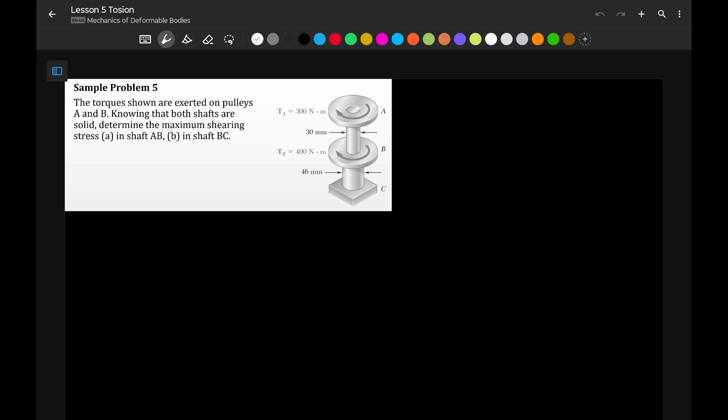So, the shaft ABC is standing vertically. We have an applied clockwise torque of 300 Newton-meter at A and 400 Newton-meter at B. Let's draw this on a horizontal orientation instead - here are our shafts.

So our shaft is divided into two segments. Here is point B, this is point A, and this is point C. We laid it horizontal since we're more used to that orientation. Point B is larger - let me correct this. Shaft BC is bigger, with 46 mm diameter, compared to shaft AB, which is smaller with 30 mm diameter.

Now let's apply the torque. To easily designate the torque, check if it's clockwise or counterclockwise, then place this symbol, which means torque or twisting moment. Let's set this direction as positive clockwise, so we know our convention. This is just a convention - it could be reversed. What matters most is that we know which is clockwise and which is counterclockwise.

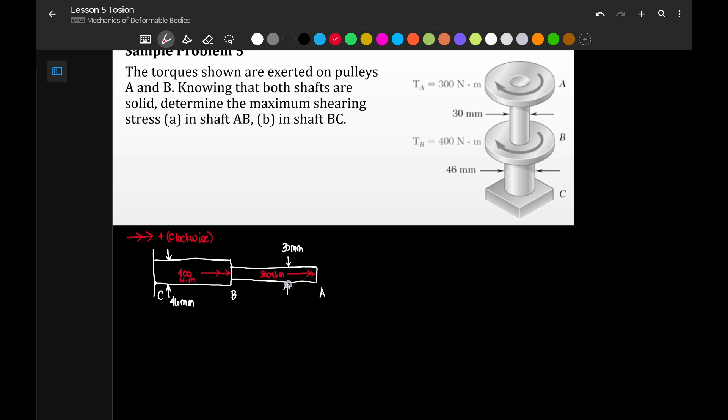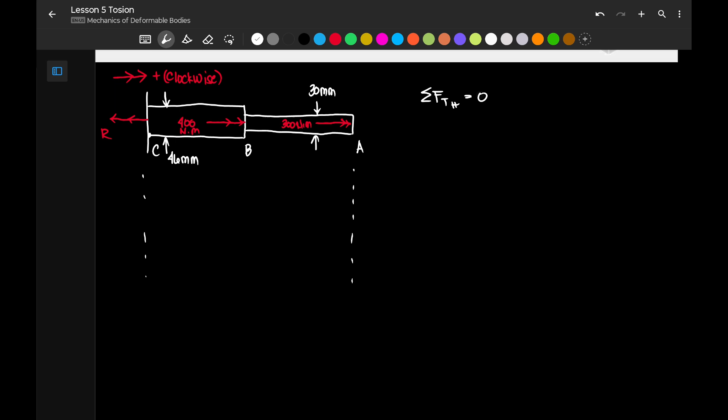Now let's create the moment diagram. By summation of moment, we can get the reaction. Taking summation of moment equal to zero, treating these as horizontal forces - summation of torque horizontally equal to zero - we get an equivalent reaction of 700 Newton-meter, and this is counterclockwise since it's in the opposite direction. So by our sign convention, that is negative 700 Newton-meter.

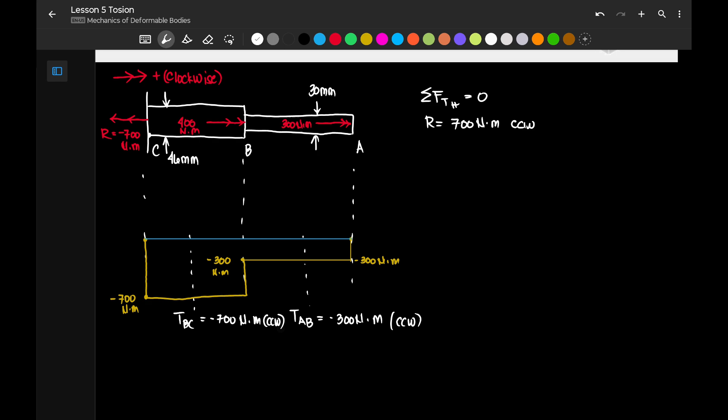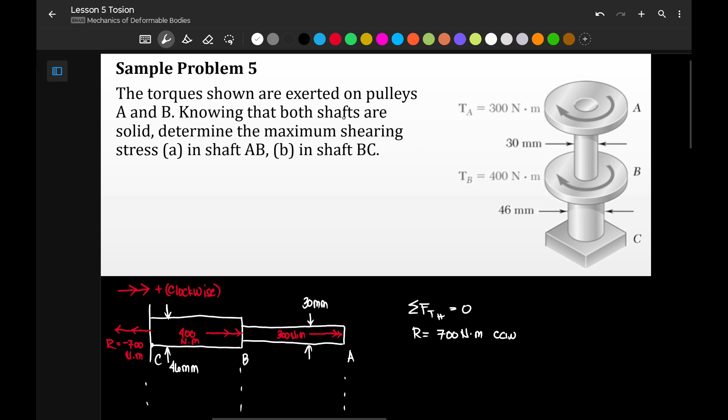Okay, so let's try to solve for the stresses from these torques. Let's start with shaft AB. Since both shafts are solid - the problem didn't indicate otherwise, but they are both solid - our maximum shear stress is equivalent to 2T over pi r cubed.

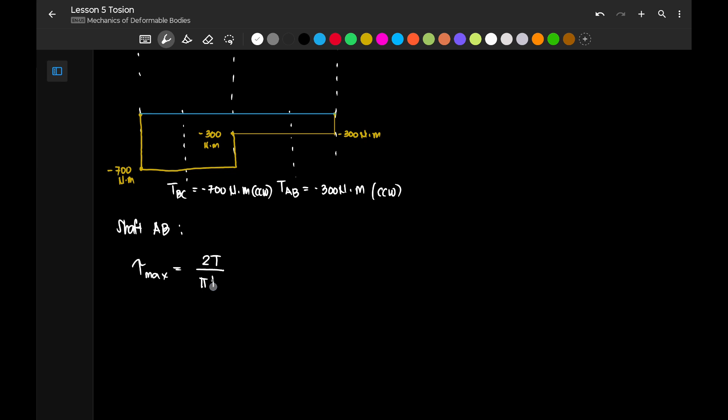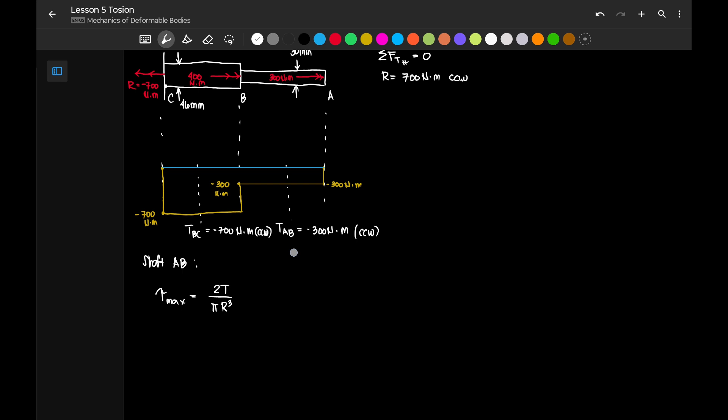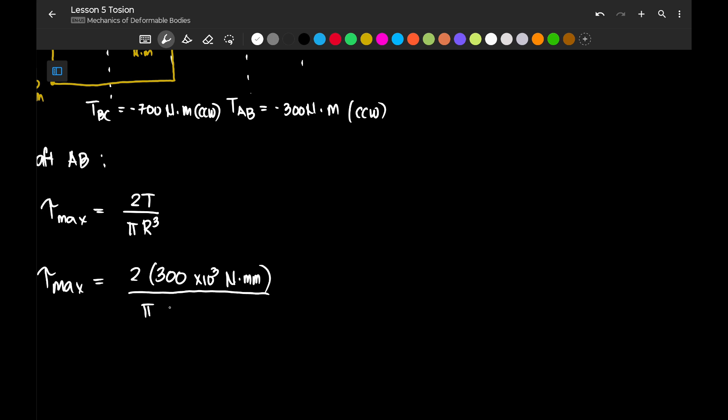For shaft AB, the diameter is 30 mm, so the radius is 15 mm. Our tau max uses T equal to 300 Newton-meter. Since it's in meters, we multiply by 1,000 to convert to millimeters, giving us Newton-millimeter, divided by pi times the radius of 15 millimeter, which is half of the 30 mm diameter, cubed. So our tau max for this problem is 2 times 300 times 10^3 over pi times 15 cubed, which gives us 56.588 megapascal. This is the stress under our shaft AB.

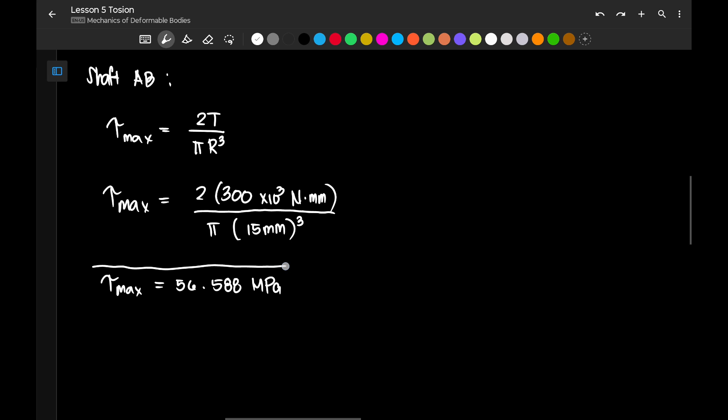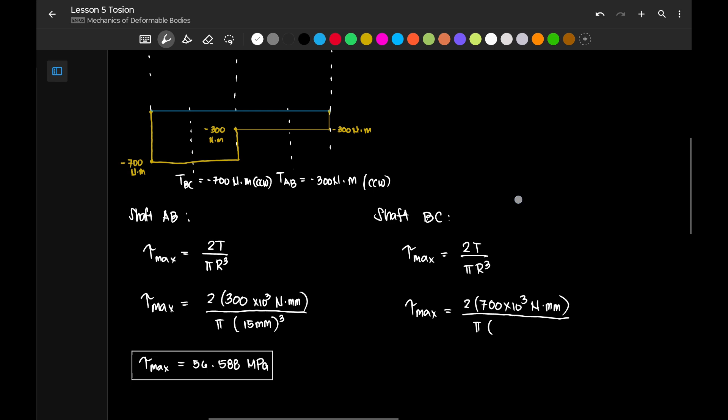Okay, next let's solve shaft BC. Our tau max is the same formula, 2T over pi r cube, same formula kasi parehong solid. So our tau max becomes dalawa. Ang torque natin for segment BC ay 700 times 10 to 3 Newton millimeter. Again, kaya nagkaroon ng times 10 to 3 ay kinonvert natin yung meter to millimeter. Then our radius for this shaft BC is kalahati ng 46, so 23 millimeter cube.

So our tau max is 2 times 700 times 10 to 3 over pi times 23 cube. We have 36.626 megapascal.

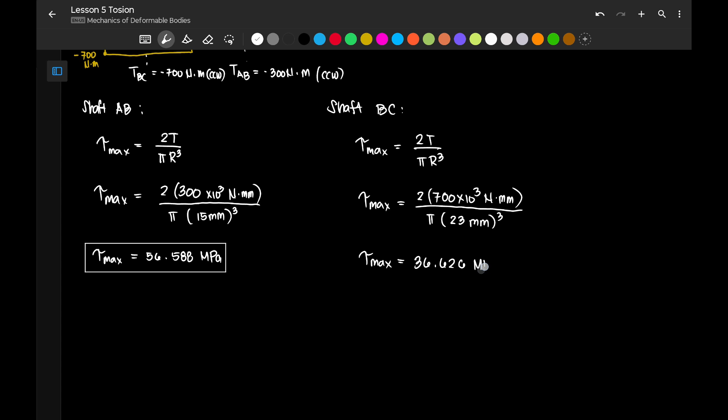Okay, now if the question is, let's say ang tanong ng problem, what is the maximum shearing stress? If this is the question of the problem, tapos ang choice mo ay A and B lang, kasi ito lang na may na-solve mo, the answer is letter A, kasi maximum ang tinutukoy. Kapag maximum stress, yung pinakamalaki ang sagot natin.

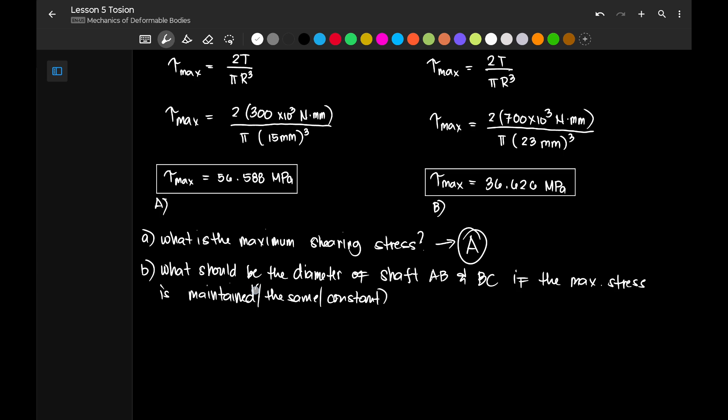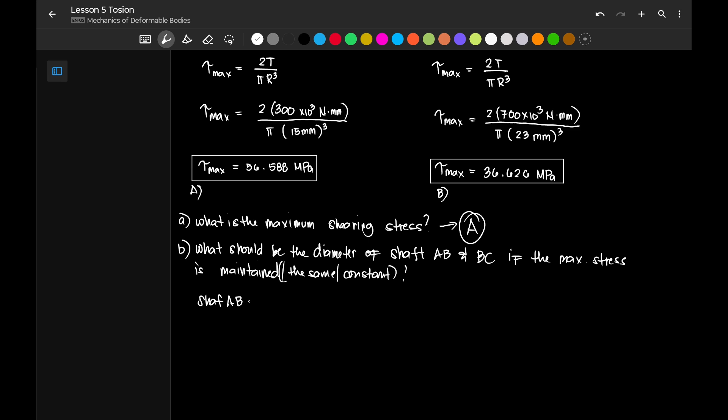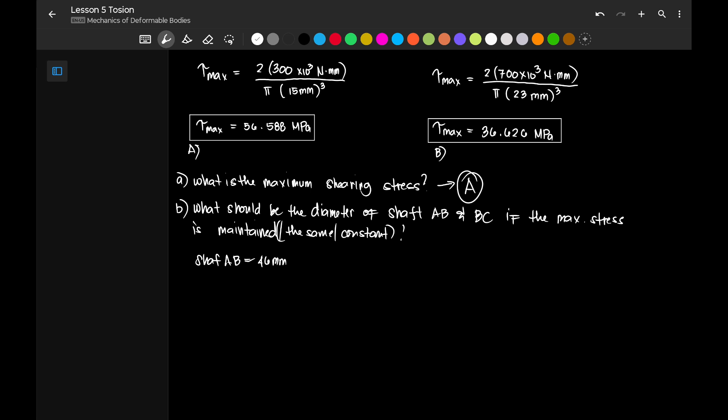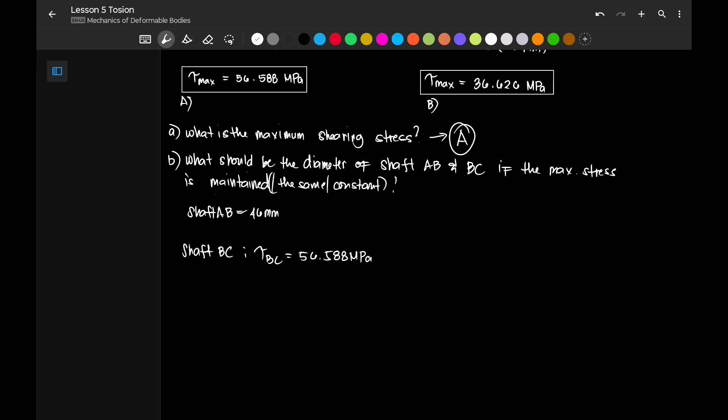Pero pagdating kay shaft BC, kunin naman natin yung magiging diameter kay shaft BC. So shaft BC tayo. So sabi natin, mare-retain daw yung stress. So ang panibagong stress na kay BC will be also 56.588 megapascal. Same value ng torque, ang hinahanap lang sa atin ay diameter. So this becomes 56.588.

I-breakdown natin itong megapascal to Newton per millimeter squared. That is equal sa dalawang torque, which is 700 times 10 to 3 Newton millimeter over pi times hinahanap natin yung diameter. So kunin muna natin yung radius, then i-multiply na lang natin by 2. So here our radius should be cube root na 2 times 700 times 10 to 3 divided by pi times 56.588. So our radius is 19.895 millimeter, or the diameter of segment BC should be 39.791 millimeter lang, or that is roughly around 40 millimeter.

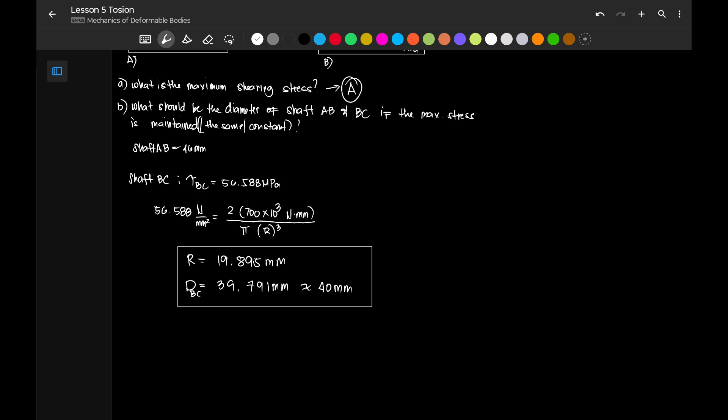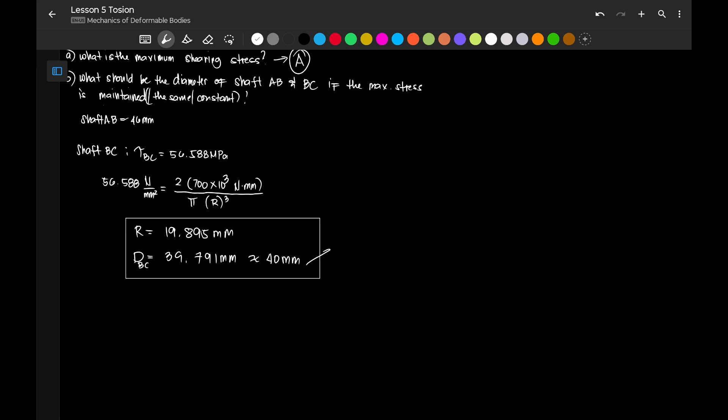So kapag ito yung ating sagot, o ito yung tanong sa ating problem, kapag pareho sila ng stress, mamimaintain natin yung maximum stress. Okay? The diameter of the shaft BC should only be 40 instead of 46. So in real life, ganun talaga tayo nagde-design. Kinukuha natin yung maximum stress ng section and then ng system, then ina-adjust natin yung section para maging economical. Kasi yung 6 mm, malaking difference yan. Okay, so that is the answer for this problem and more.

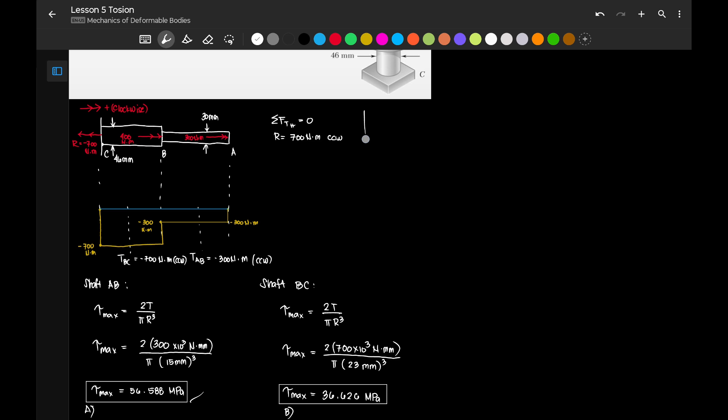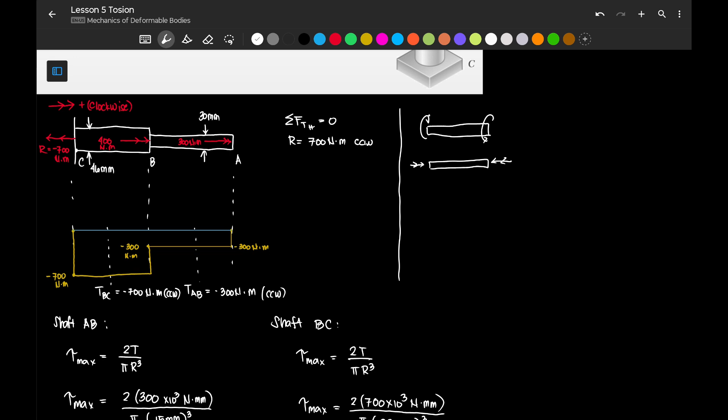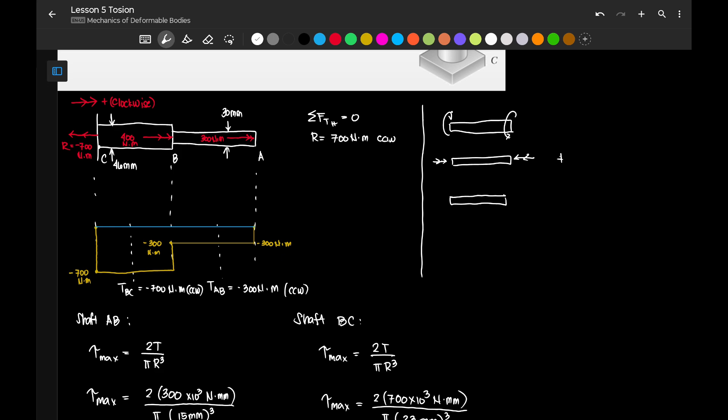Dinagdagan pa natin. Okay, now to clarify pala, bago tayo umalis sa topic na to, sometimes may iba na ang notation, di ba kung babalikan natin yung discussion natin, na kapag yung moment natin ay pag ganito, mahirap kasing makita eh. But in this case, ito yung shaft natin, yung moment dito ay clockwise. Okay, and then syempre, yung counter dito, yung reaction should be counterclockwise. On some books, ito yung positive, which is aligned naman with what we are doing right now. Sa problem kasi natin, ang meron tayo ay sa point B, clockwise, and then dito ay counterclockwise. So, that is pag ganon, tsaka tensile. So, this is minus naman sa kanila.

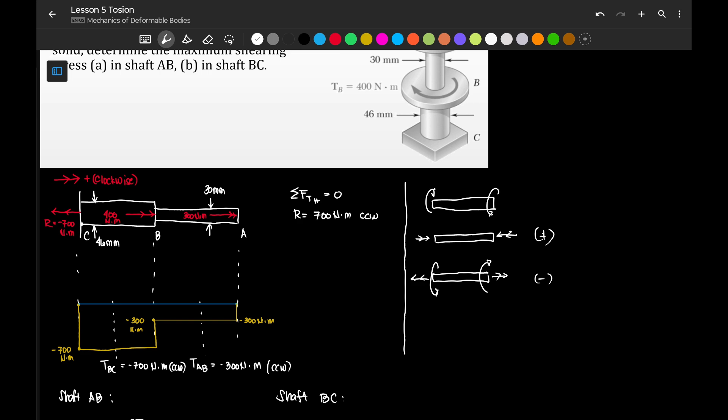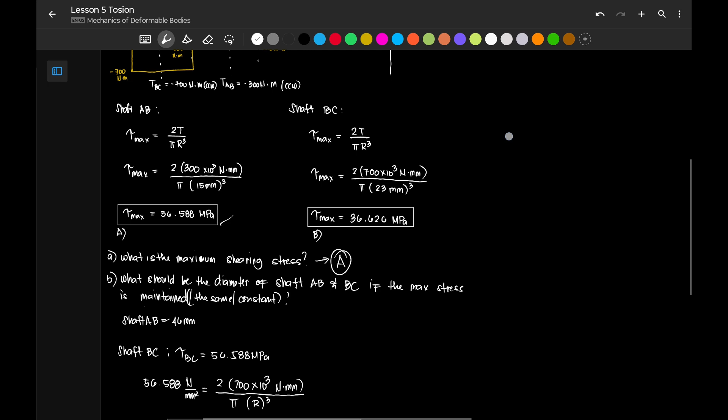Okay, again, importante si sign convention, pero ang importante rin is alam mo kung ano yung ginamit mong sign convention. Kasi ang mag-govern naman dito if it is either clockwise or counterclockwise. Wala naman tayong tension and compression dito unlike sa axial load. So the same pa rin yung value ng stress natin regardless of the sign convention. Magbabago lang or magmamatter lang si sign convention pagdating sa angle of twist because we want to identify the angle of twist if it is clockwise or counterclockwise. And that's it for this problem.

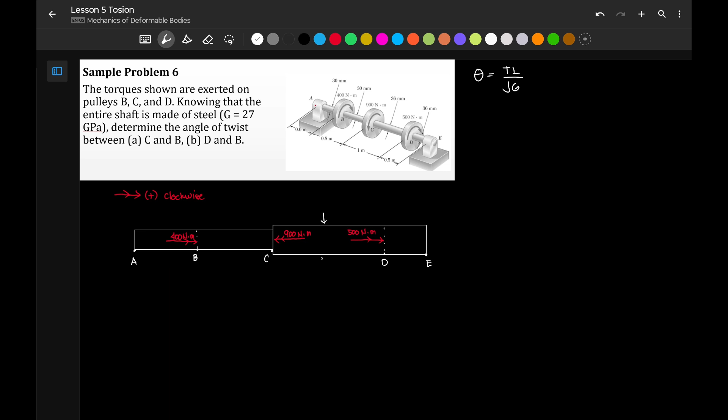So ito yung ating system. Kung mapapansin natin, we have shaft A, B, C, D, E with applied torques 400, 900, and 500 on points B, C, D respectively. Given yung diameters 30 for shaft A, B, C, and then lumaki naman pagdating kay shaft C, D, E to 36 mm. So drawing ko na siya dito para lang medyo mabilis tayo. Then ipinlot ko na rin that assuming yung ating direction clockwise positive to the right. Okay, so again, this is just an assumption or a sign convention na ine-establish natin.

Kung baliktad yun sa'yo, okay lang, but importante na malaman natin kung ano yung direction ng angle of twist. Now, the problem did not specify kung anong types of support yung meron tayo. Pwede kasing frictionless roller lang na walang nagre-resist, pwede rin naman fix. So if not given, we assume na hindi siya fix, kundi frictionless lang. So if that's the case, pag nag-twist itong ating B, sasabay lang mag-twist si AB.

Okay, so ang torsion kasi ay similar with thermal stress. Nagkakaroon lang ng stress if nagkakaroon ng resistance or pagpigil. Kung pinipigilan natin yung material mag-rotate, doon lang nagkakaroon ng stress. But if hindi natin siya pinipigilan mag-rotate, walang stress, wala ding deformation.

So again, kung ang ating support at A and support at E are assumed to be frictionless kasi hindi in-specify nung problem, we assume that these are frictionless supports. Pag nag-rotate si B, sasabay lang ng rotation si AB, so wala siyang nararanasang stress. Same with D, pag nag-rotate yung pulley at D, wala ring nararanasang stress yung DE.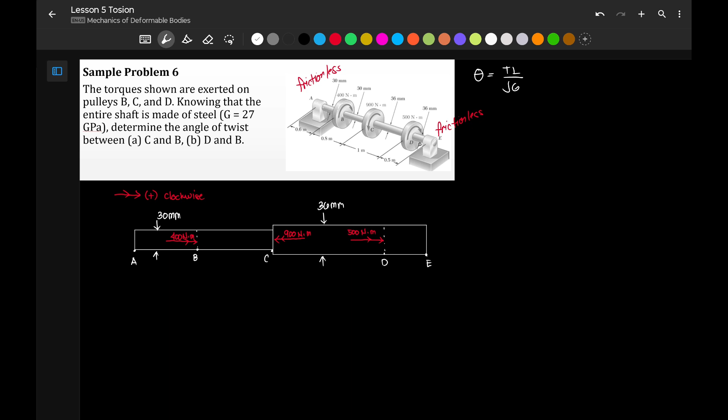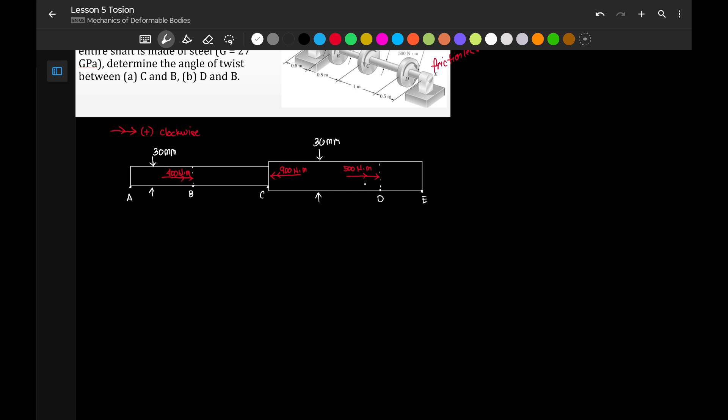One way to know is that yung summation of forces natin is equivalent to 0. Therefore, yung mga reactions natin, they should be equal also to 0. I-plot natin ito, kung smooth yung ating support, similar yan sa pin and roller ng ating beams. Now, smooth yung ating support, walang nararanasang stress, so 0 lang yung load natin at this point.

Ilagay ko pala to. Okay, so at this point, 0 lang yung nararanasan nating torque kasi smooth siya, frictionless. So dito 0 pa rin.

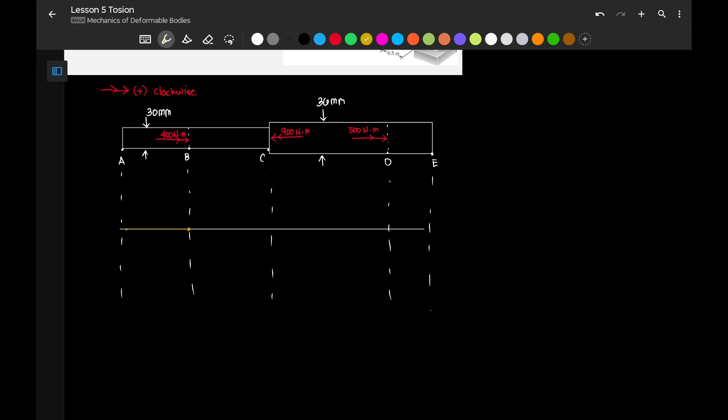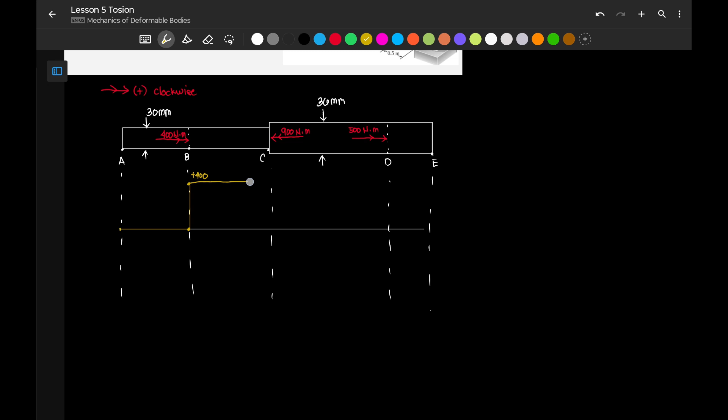Pero sa pagdating kay point B, may pag-angat na tayo, positive na 400 Newton meter. So positive 400, and then walang load, horizontal lang dito. Positive 400 pa rin, pero at point C, may downward, meron na tayong left na 900 Newton meter. So that is negative, bababa tayo to this one is 400 minus 900. We have negative 500, and then this one is also negative 500 kasi wala namang additional load.

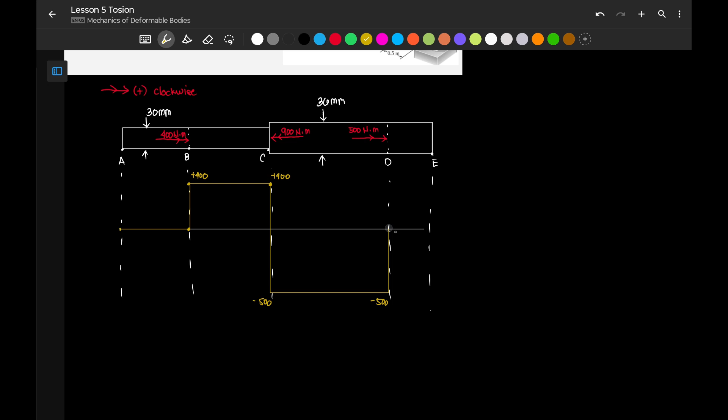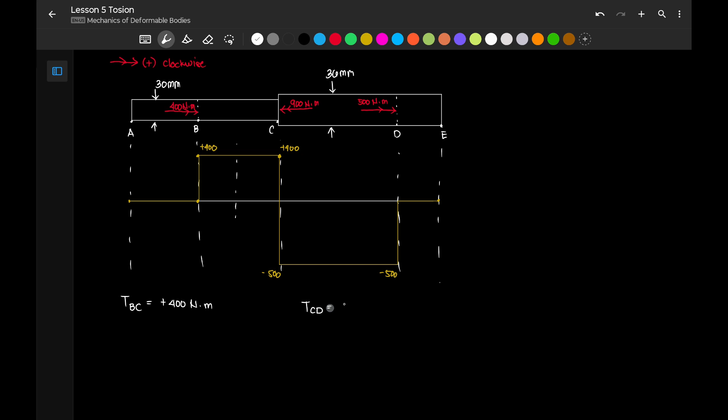So dito 500 which results into a 0 torque at point DE. So dalawa lang yung torque natin, meron tayong torque dito. We have the torque at segment BC which is equivalent sa positive 400 Newton meter, meaning clockwise. And torque CD naman is negative 500 Newton meter, meaning counterclockwise.

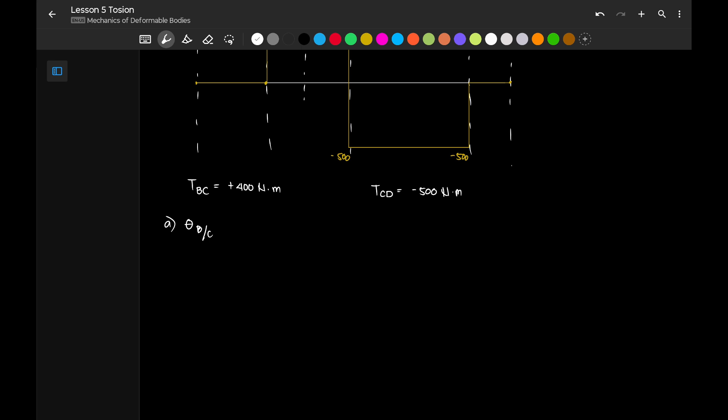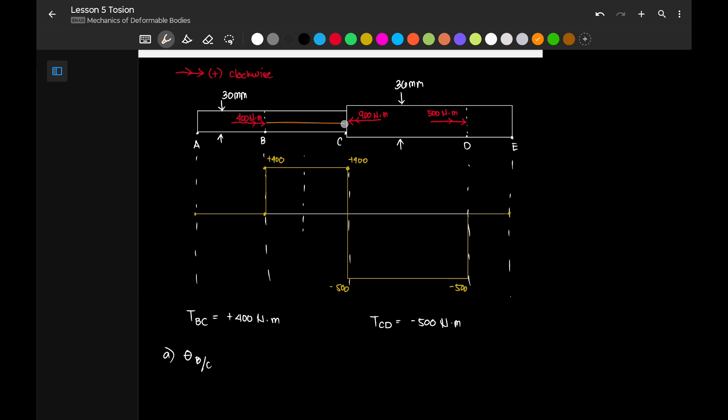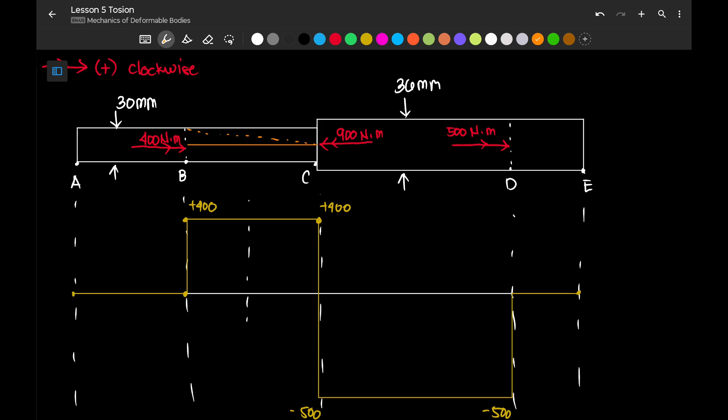So yung tanong sa atin ay ang angle of twist, angle of twist between B and C. So pag naglagay ako ng straight line dito at nag-rotate yung beam natin, ano yung magiging angle nito pag nag-rotate na yung beam natin? Ano daw yung magiging angle na to? Okay, so yun lang yung tanong ng problem.

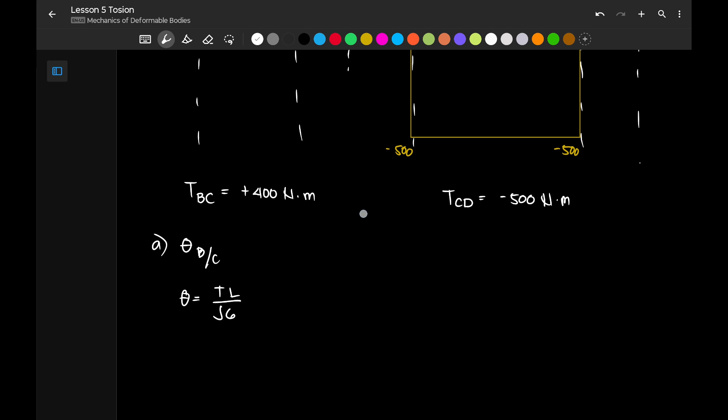Now, the formula for the angle of twist is TL over JG. Take note of this, kapag ginagamit natin yung formula, dapat ang units na gagamitin natin, yung length natin should be in meter or inches only. Yung ating G is in Pascal. Yung J ay meter raised to 4. And yung T natin is in Newton meter.

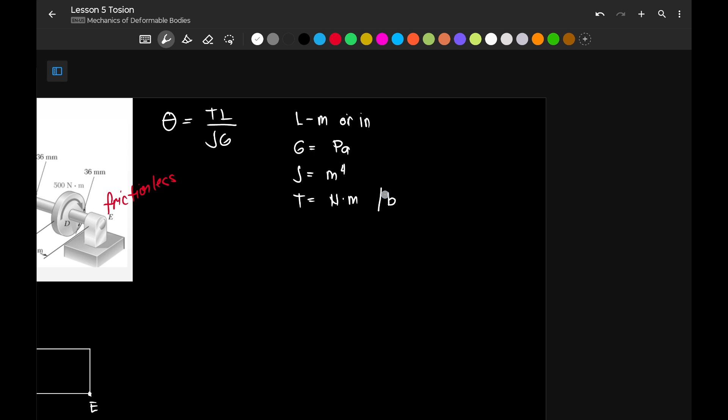Pwede rin namang pound inch. Pwede rin namang inches to the fourth. Pwede rin namang PSI.

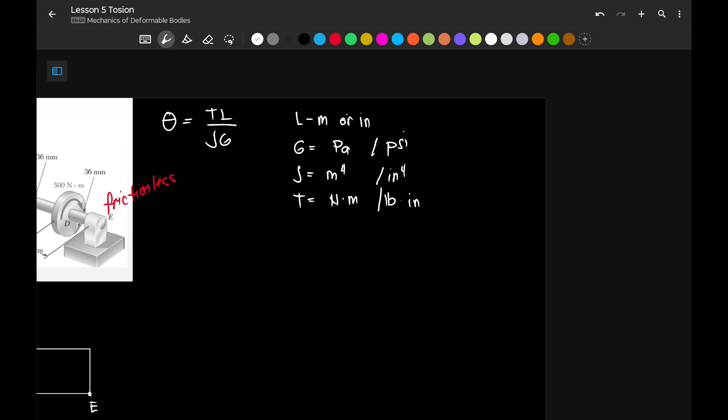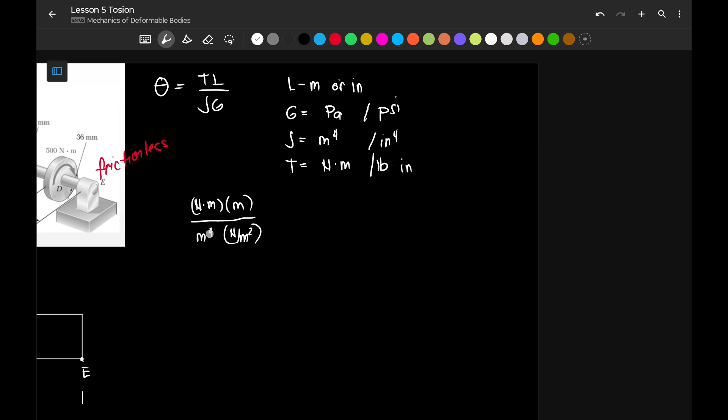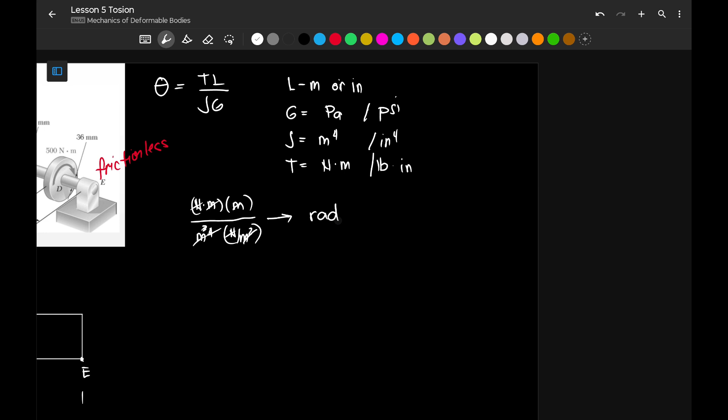Okay, so kailangan lang consistent tayo ng unit kasi kapag nag-unit analysis tayo, let's say ang torque natin Newton meter, ang length natin ay meter, ang ating J ay meter raised to 4, ang ating G ay Newton per meter squared. So ito magiging squared, yung squared natin makakancel, so tanggal na to, unitless kasi dapat ang lalabas dito. And the value of theta, dapat yan ay naka-radians. So, again, consistency lang ng unit. Yun lang pinapaalala ni sir.

Ngayon, kung gusto mong gumamit ng millimeter and megapascal, okay lang din. Make sure lang consistent tayo ng units. Pareho lang okay yun, kailangan lang consistent ng units.

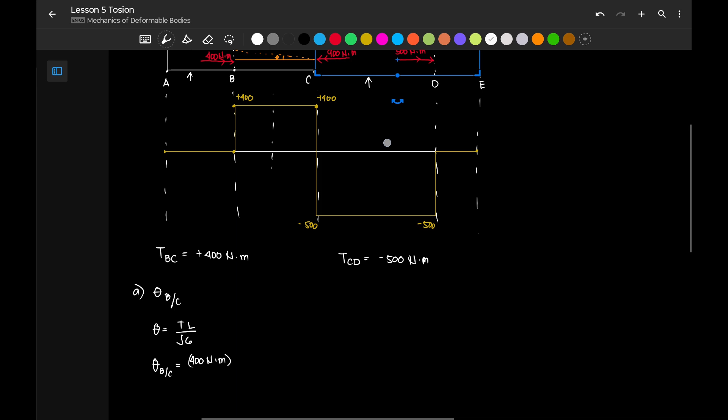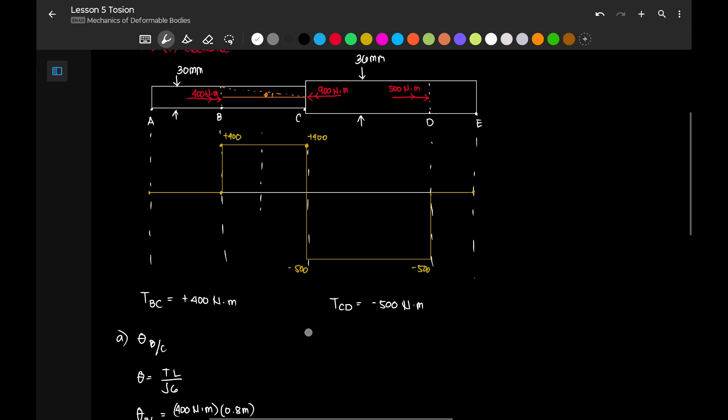So kunin natin yung stress ay yung ating deformation ng BC. So our torque is 400 Newton meter. Okay, then ang length natin according to the problem for segment BC is 0.8 meter. Ang polar moment of inertia natin, since ang diameter natin ay 30 mm, pwede natin gamitin yung pi over 32. Yung 30 mm, i-divide natin ng 1,000 para maging meter, tapos i-raise to 4 natin, kasi yan yung formula ng polar moment of inertia.

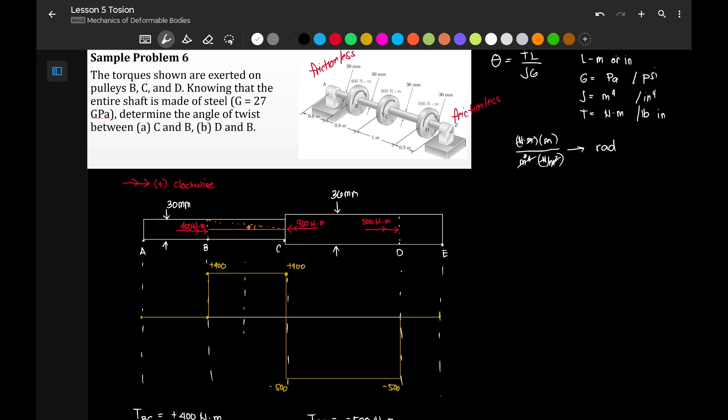And our G, the modulus of rigidity daw is 2.7 gigapascal, and that is 2.7 when we say giga, that is times 10 raised to 9 Newton per meter squared. So yung ating units ay makakancel lahat.

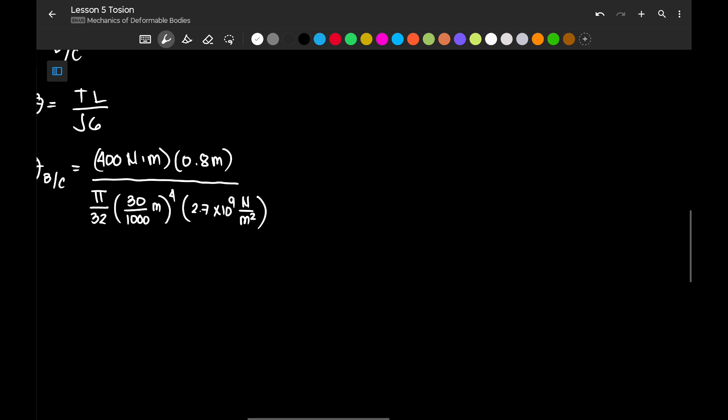So, our deformation or angle of twist of B with respect to C, that would be 400 times 0.8 over pi over 32 times 30 over 1,000 para sure tayo, raised to 4 times 2.7 times 10 to 9. We have an angle of twist na 1.4904 radians. Then convert natin sa degrees by multiplying to 180 degrees per pi radians.

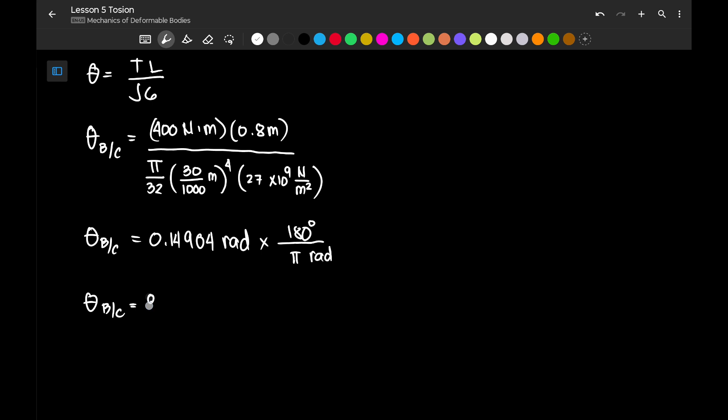Okay, so we have angle BC times 180 over... 27, sorry, 27 pala to, not 2.7. Kaya pala ang laki. So this is 0.14, gagalaw lang na isang place. So this is 8.539 degrees. This is our answer for our first problem.

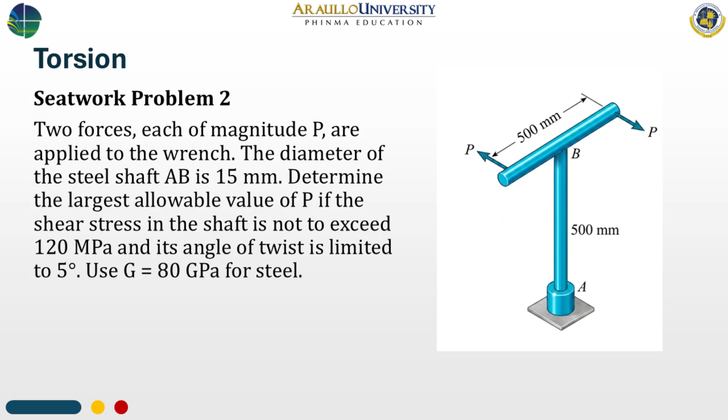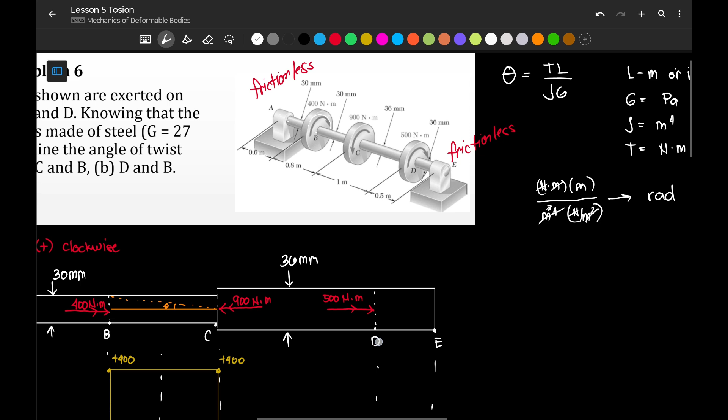Okay, next for number 2, ang hinahanap naman sa atin or letter B, ang hinahanap ay kay DB, the angle of twist from point D with respect to B. Tama ba? Point D with respect to B. So yung angle of twist dito hanggang dito, baliktarin natin, pareho lang naman to pag biniba natin.

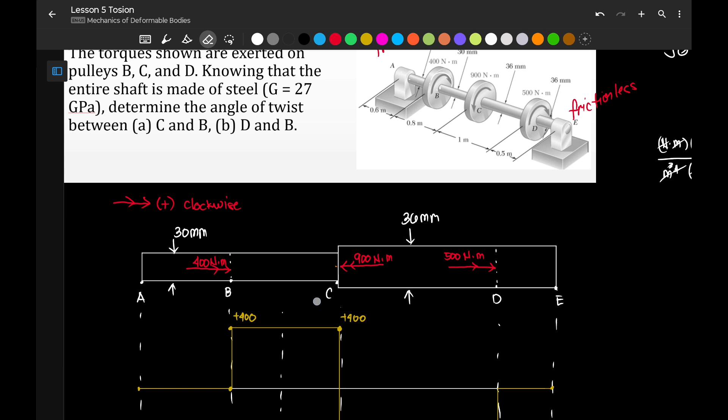Iba, ay tama to. Ito, palitan natin na ang tanong kasi sa atin ay C with respect to B pala. C with respect to B. But we have the same value, ano? Yung subscript lang yung nagkabaliktad. But this is C over B.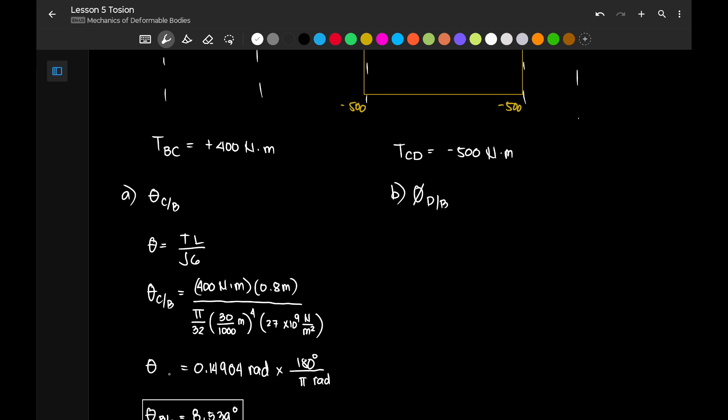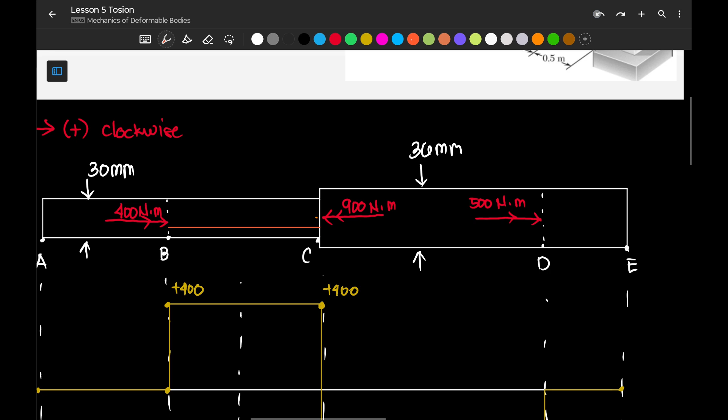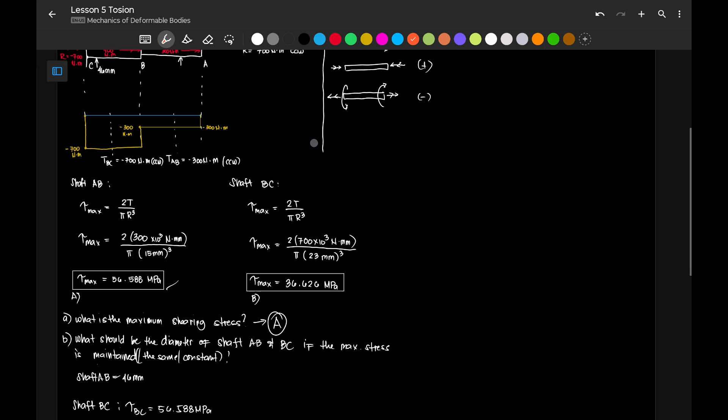So kapag ipinlat natin yan, if we draw a horizontal line here sa baba, so assume na ito yung horizontal line. Since ang nakuha natin ay clockwise ito, so ang pagbaba natin ay clockwise, no? So pagbaba natin clockwise, bababa ito ng clockwise, aangat yung line natin. Then, ang sabi ng problem, hanapin na rin daw natin yung magiging angle of twist ng line na to.

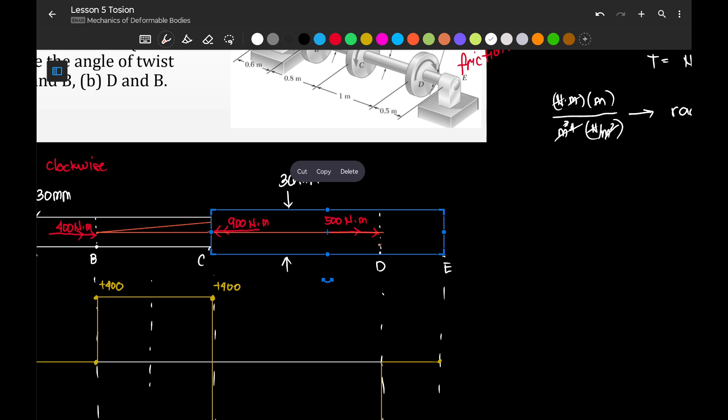Kung magdodraw tayo ng line, saan yung final position niya dito sa point D. Pwedeng nandito, yan yung titingnan natin. Okay? But, ang alam natin, meron na tayong angle of twist from CB. So, yung angle of twist ng D to B, or D with respect to B, that would be the angle of twist ng D with respect to C plus angle of twist ng C with respect to B. So kumbaga, pagagapangin natin. Kunin muna natin yung angle of twist ng D with respect to C.

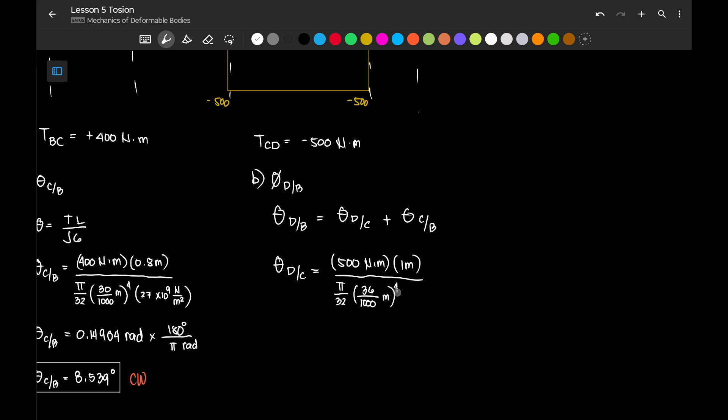So, that is, our torque is 500 Newton meter. Take note, negative dapat ito, ano? And the length of our shaft is 1 meter, divided by pi over 32. Ang diameter ng shaft natin ay 36 over 1,000 para maging meter, raised to 4, times ang ating G ay 27 pa rin kasi pareho naman silang steel. So 27 times 10 raised to 9 Newton per meter squared. So cancel lahat ng unit.

I-convert na natin to degrees by multiplying it to 180 over pi radians. Okay? So our angle of twist from D to C ay 1 over pi over 32 times 36 over 1,000 raised to 4 times 27 times 10 to 9. We have multiply na rin natin sa 180 over pi. So the angle of twist is 6 point... this should be negative.

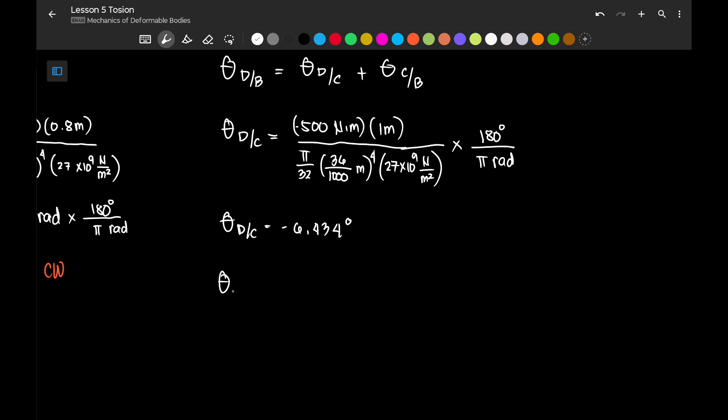6.434 degrees. So our theta D with respect to B will be 8.539 degrees minus 6.434 degrees. So our angle of twist ng point D with respect to B is minus... we have 2.105 degrees, and this is clockwise rotation.

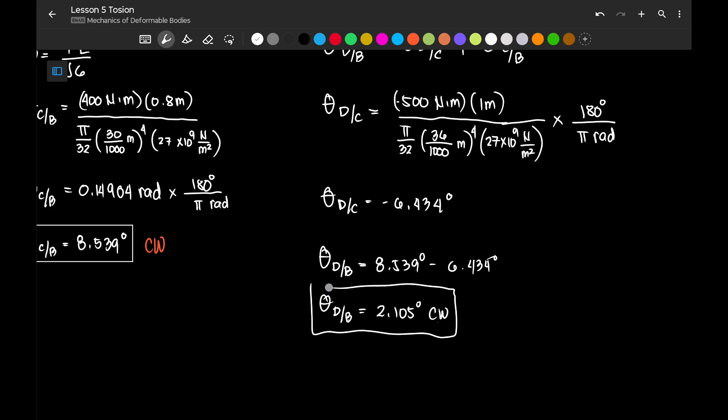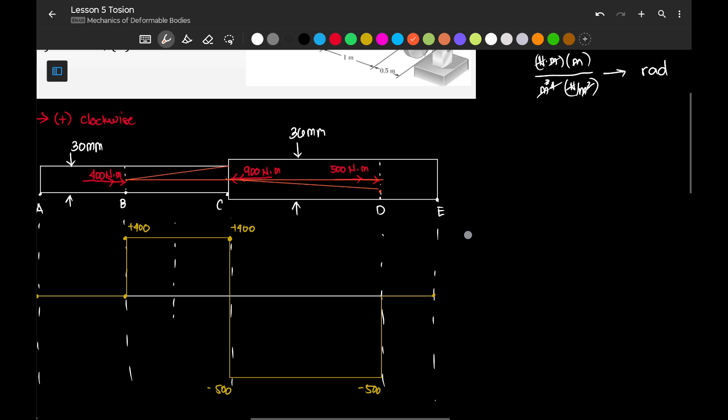Okay, so in summary, kung ito nag-twist dito, ito kasi, dito magti-twist naman siya ng maliit lang yung iti-twist niya, kasi ano lang, 6 degrees lang. So mas maliit compared dun sa isa. So, in summary, ang kanyang angle of twist ay magiging napupunta rito yan. May around gitna lang. So ito yung final position ng D, considering yung dalawang angle of twist. So, what will happen here is parang ganito.

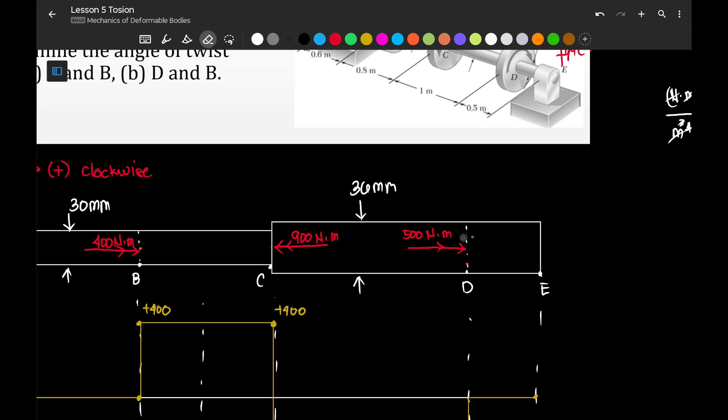Itanggalin natin, baka malito kayo. Okay, remove ko muna to. Yan. So, imagine nyo, meron tayong line na dito. Ito yung reference line lang natin, random line lang. So, sa problem natin, yung first deformation natin ay positive 8.

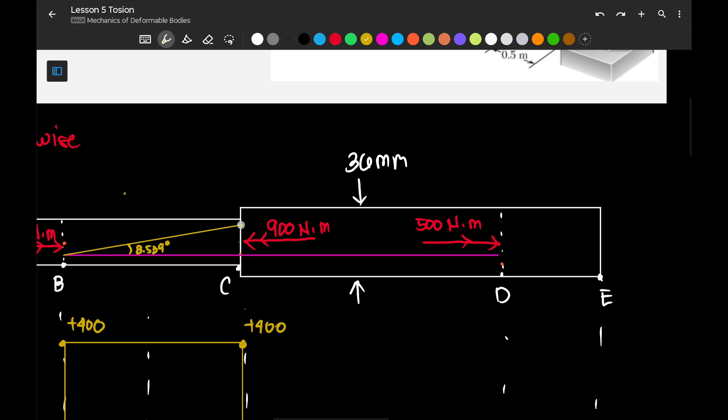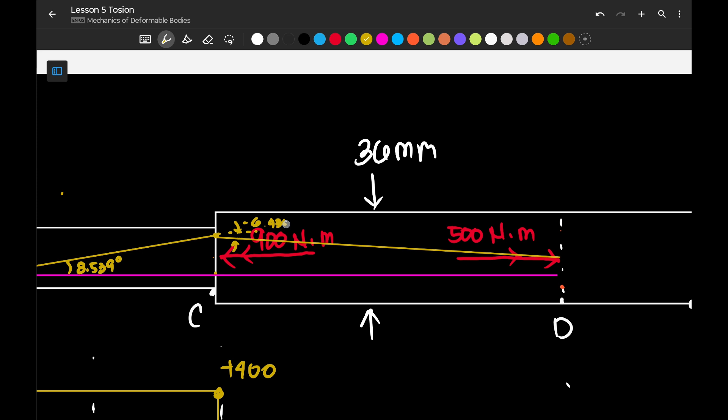So, napunta siya... sabihin natin to exaggerated lang. Ito yung 8.539 degrees. So yung point C napunta rito, mula dito, umangat siya dahil doon sa pagkaka-twist natin. Then, after this, nagkaroon ng deformation naman dito. Yung deformation dito, di dapat yan sasakto, yan ay negative 6 degrees lang. So, from the horizontal axis, ito yung negative 6.434 degrees. So, hindi siya nakabalik sa original position niya.

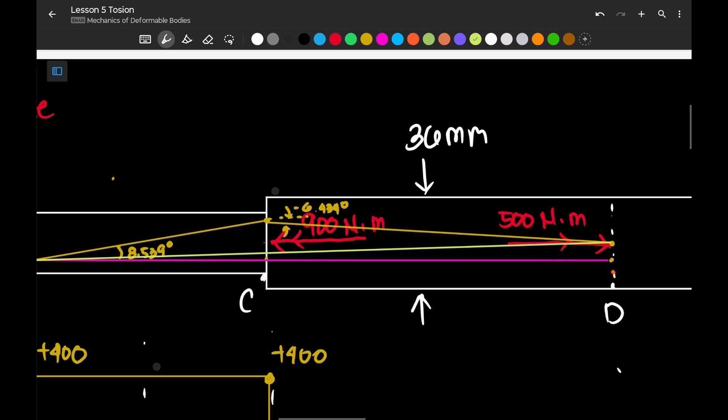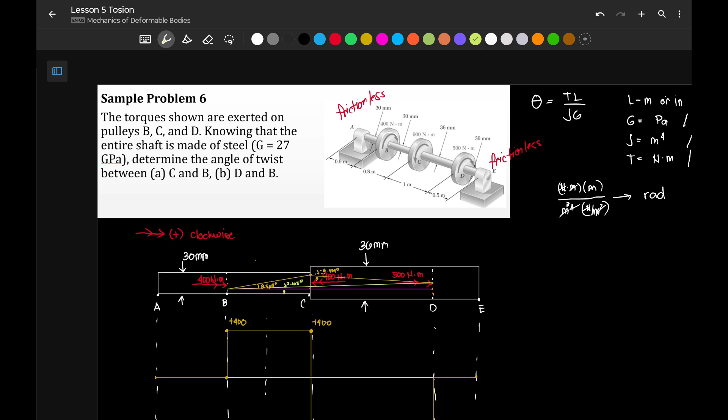So, yung line ngayon, itong line na to, yung magkoconnect sa kanilang dalawa, that is the angle of twist ng point D with respect to B. And this line, ito yung nakuha nating 2.105 degrees. Alright, and that's it for this problem.